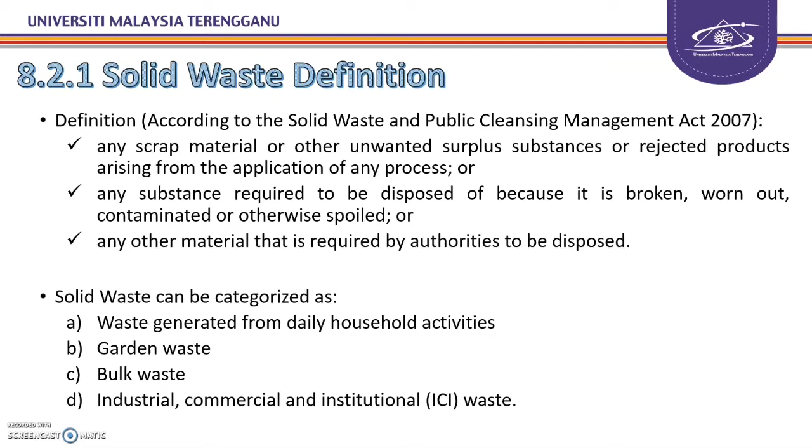And then number 4 is industrial, commercial, and institutional waste. It is considered as solid waste for the waste that is not hazardous waste. For the waste that is considered as hazardous waste, it will be classified as hazardous waste, and otherwise it will be classified as solid waste, even though it is produced from the industrial or commercial.

The second topic is solid waste generation. So developed countries generate much higher quantity of waste per capita compared to less developed countries. Why? Because they have more population than less developed, and because they are developed, they tend to use more packaging and something like that.

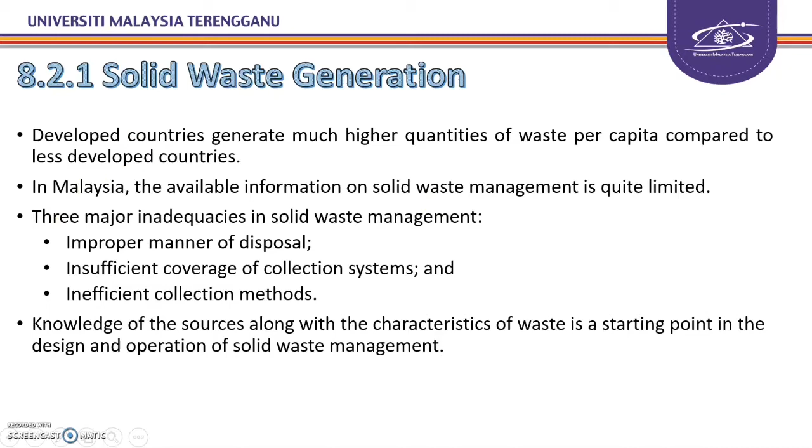About the sources and types of solid waste, actually we can classify it into different sources. The first one is residential. You can read by yourself the details about the sources for each type. The first one is residential sources. So the types are such as food waste, paper, plastic, cardboard, aluminium, and so on. It's general waste. And then the second one is commercial, for example shops, restaurants, and so on.

The types are more on paper, cardboard, plastic, and also food waste and metals. So it depends on what type of business they are doing. Okay, and then institutional, for example school, hospital, universities. So the types are paper, plastic, cardboard, and so on. Construction and demolition, for example from new construction sites, the types are wood, steel, concrete, dirt, pipes, and all

about the construction materials. Then municipal services such as street cleaning, landscaping, recreation areas. The types of solid waste are rubbish, dirt, tree trimmings, garden waste, and so on. Okay, and then treatment plant sites. Treatment plants also produce solid waste; as long as it's not considered hazardous waste, it is classified as solid waste. For example, sludge from water, wastewater, industrial processes, municipal incinerators. So the type is mainly residual sludge.

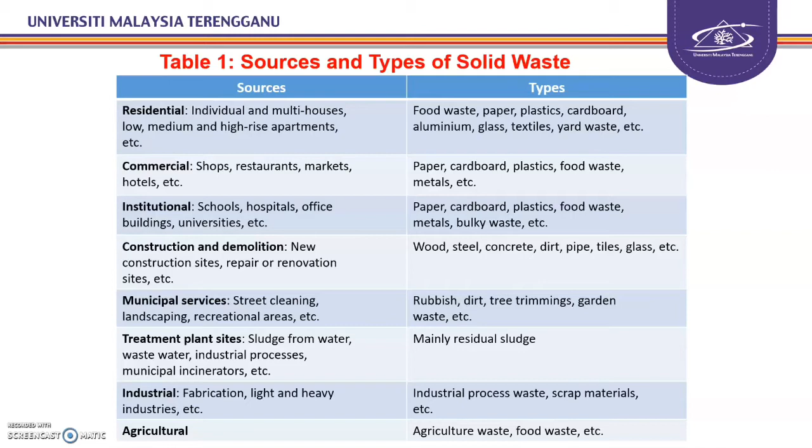Okay, overview of solid waste management. So this is the definition by the textbook. It is a discipline which relates to the control of generation, storage, collection, transfer and transport, processing and disposal of solid waste in a manner that is in accordance with the best principles of public health, economics, engineering, conservation, aesthetics, and other environmental considerations, and that is also responsive to public attitudes. So a very long definition, but it is a very precise and holistic

definition. Okay, so as you see in the definition, they stated the elements that need to be conducted in managing solid waste. The key players in setting the policy, strategies, and implementation of solid waste management: the first one is of course our federal government. We get the budget from the EPU, then the DOE as the enforcer, and then the Ministry of Health. And then it goes down to the state government, and the state government goes down to the local authority.

That's why the local authority is given the area of their enforcement. So you can see that different areas manage their solid waste differently. For example, if your hometown is in Selangor or Kuala Lumpur, you can differentiate the system with Kuala Nerus here at UMT. So that's why the system is different,

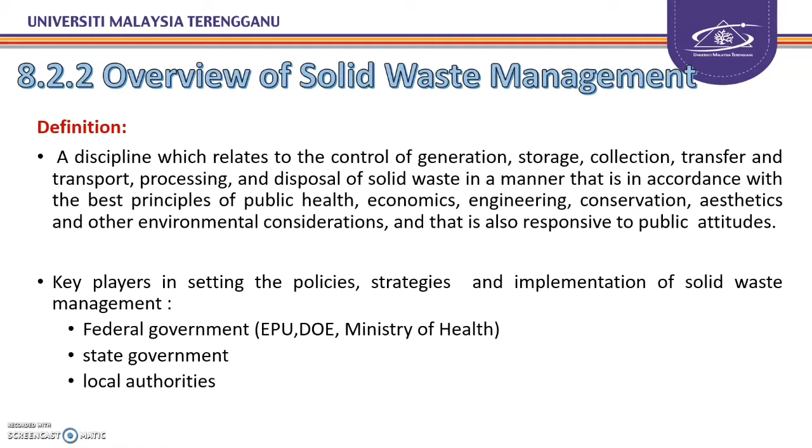Okay, if you look at this flow chart or framework, these are the functional elements that have been stated in the solid waste management system definition. So basically, waste is generated, and after that, there is waste handling, separation, storage and processing at the source, and then after that, a truck or lorry comes for the collection of our solid waste.

And after the collection, there will be two paths. One, they go to transfer and transport, and the other path is for separation, processing and transformation of solid waste. And there is a third path, which is from collection directly to disposal. For less densely populated areas, the collection will be directed to disposal.

But for densely populated areas, for example Selangor and Kuala Lumpur, the waste must go to transfer and transport or separation and processing before it is disposed. This is to reduce the volume of solid waste to be transported to the disposal site.

Okay, this is the hierarchy of solid waste management. This hierarchy is one of the elements in integrated solid waste management, because we cannot dispose all of our solid waste. Some of the solid waste can be reused, some can be recycled, and some can be used for resource recovery, to produce other beneficial products. So integrated solid waste management is the term that can be used to define the selection of suitable applications to achieve specific waste management objectives and goals.

So if we have a look at this management hierarchy, it is an upside down triangle. So if you see, the bottom point is the landfilling method. So it means that we want to try our best to reduce the volume of solid waste that goes to the landfill. And then if you go to the upper part, the top part, the most preferred management is source reduction, meaning that the source must be reduced at the production stage.

And then it's going down. The second option is reuse, then recycling, then resource recovery, and then incineration, and landfilling is the last, or we call it the least preferred method in the solid waste management hierarchy.

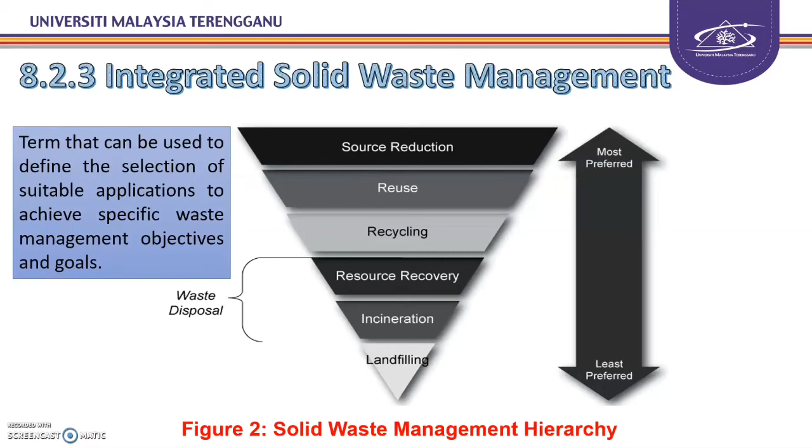Okay, this is the definition for each element in integrated solid waste management. Okay, the first one, what is source reduction? Source reduction is reducing the amount or toxicity of the waste that is being generated. Design stage, manufacture and packaging of the product with minimum toxic content and utilizing minimum volume of material.

Okay, I can give you one example. If you go to Mydin and then you buy fabric softener such as Softlan, I know all of you know about the brand, right? Okay, there is improvement or innovation of their packaging system. Okay, one product is in a bottle and the other one is inside a plastic but in a small capacity.

So in that plastic is the concentrated softener, meaning that they have reduced about three quarters of the packaging volume by making a concentrated softener. But when the consumer wants to use it, they have to dilute it with water. So this is one of the concepts of source reduction that has been applied.

Okay, and then it is the most effective way to reduce waste in terms of quantity and cost associated with handling. I agree with this. Source reduction is the efficient way in reducing the solid waste volume, but in Malaysia we are still lacking awareness among the citizens. Okay, so that's why our role is to educate the people to have more source reduction at the source rather than afterwards.

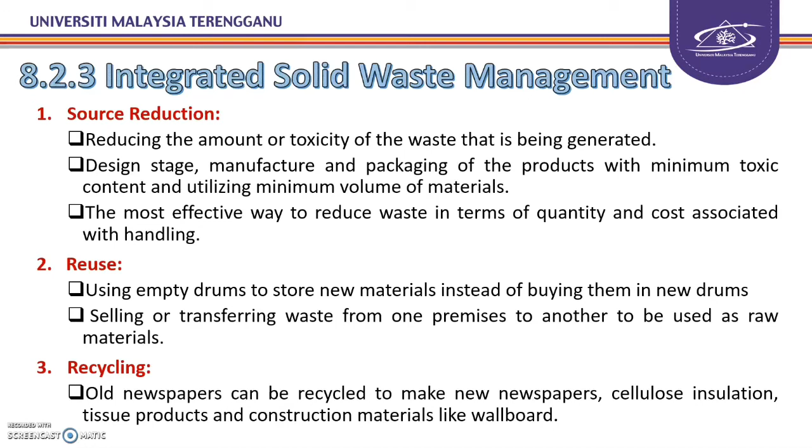Okay, and then recycling, we transform things into new things. Okay, for example, plastic and papers, and I know all of you know about this. So this is the example. Old newspaper can be recycled to make newspaper, cellulose insulation, tissue products, and construction material like wallboard.

Okay, number 4 is resource recovery. So what is this? This is the method that involves the physical, chemical, and biological alteration of waste. The transformation of waste material can be an attractive option as it significantly reduces the amount of the waste, and at the same time, it can also recover useful energy in the form of steam or electricity.

Okay, actually, my research background is based on this resource recovery option. So I'll give you an example of what my final year student has done in the previous year for their project. Okay, we use organic waste, such as fruit waste and vegetable waste that is abundantly available in the market.

Okay, we use that, and then we use a fermentation method to produce enzyme. So this enzyme can be used in the wastewater treatment system, and sometimes people also use it for fertilizer, because this enzyme contains effective microorganisms. Okay, and then the other example is